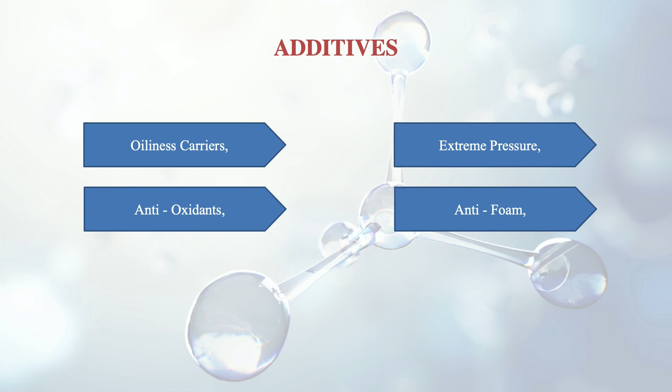Now we discuss the synthetic lubricating oils. We have seen the natural ones before; now the synthetic ones, which are manufactured by human beings for more severe operating conditions like those existing in aircraft engines, in which oil may have to be pumped at -50 degrees centigrade, but when the aircraft is landing or taking off, the same oil will get heated to as high as 250 degrees centigrade. So the range of variation is around 300 degrees centigrade.

Such properties are needed that it should not freeze, and it should not break down at high temperature. High temperatures and high operating pressures require oils which give superior resistance to oxidation with a high viscosity, but they must possess a sufficiently low freezing point, and the lubricant should be non-inflammable as well, because at 250 degrees centigrade it can catch fire if its ignition point is not high.

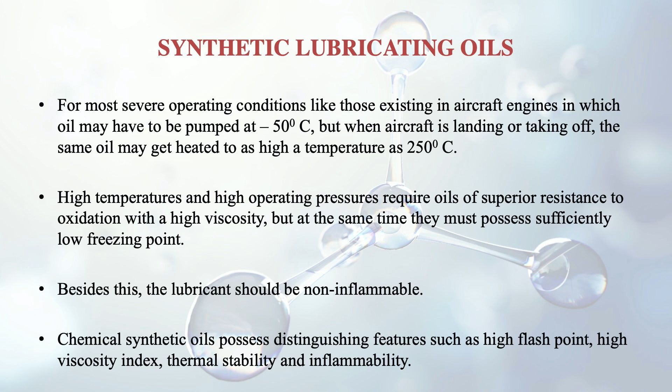Chemical synthetic oils possess distinguishing features such as high flash point, high viscosity index, thermal stability, and non-inflammability. Like I told you, it should not burn at a low temperature; the flash point should be at least above 250 degrees centigrade. That's why high flash point is given here.

Then come the greases, or semi-solid lubricants. Till now we discussed the liquid type; now we discuss the semi-solid, the second category according to physical state. Lubricating grease is semi-solid, consisting of soap dispersed throughout a liquid lubricating oil. The liquid lubricant may be petroleum oil or a synthetic oil, and it may contain additives for specific requirements.

Greases are prepared by saponification of fat with alkali. Saponification is a process where we use fat and oil to make soap-like things. This is followed by adding hot lubricating oil under agitation. The total amount of mineral oil added determines the consistency of the finished grease, so according to the consistency we need, we add the mineral oil.

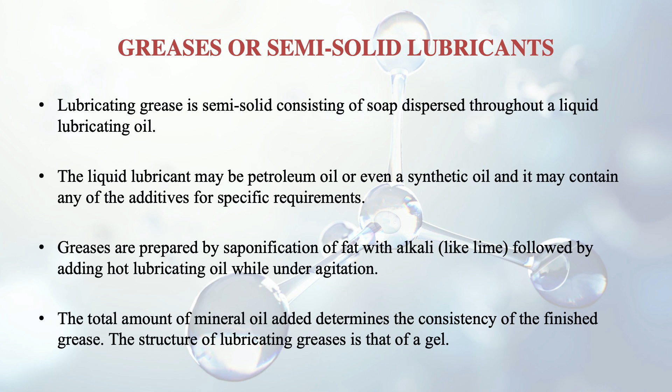The structure of lubricating greases is like that of a gel, like toothpaste or shaving cream. Soaps are gelling agents which give an interconnected structure containing the added oil. At high temperatures, the soap dissolves in the oil, the interconnected structures cease to exist and the grease will liquefy. So its property of providing semi-solid lubrication will go away.

Consistency of greases may vary from a heavy viscous liquid to a stiff solid mass. They may become solid at some point, and completely liquid at some point, so consistency varies. To improve the heat resistance of grease, inorganic solid thickening agents are added. Again, additives can improve the property as per our need.

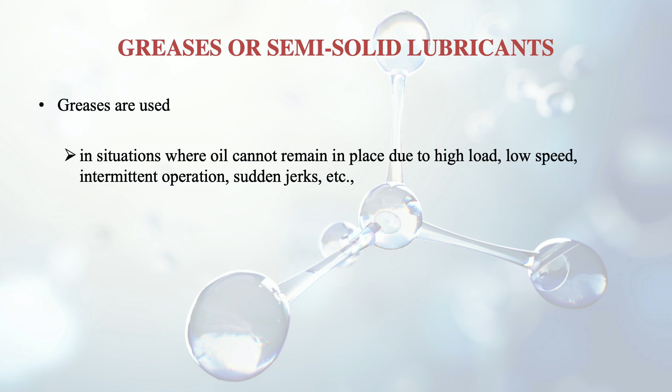Greases have higher shear or frictional resistance than oils, and therefore can support much heavier loads at lower speeds. This is a very good property of grease. They are used in situations where oil cannot remain in place due to high load, low speed, intermittent operation or sudden jerk, and in bearings and gears working at high temperature.

Also in situations where a bearing needs to be sealed against entry of dust, dirt, grit or moisture, because greases are less liable to contamination by these. And finally, in situations where dripping or spurting of oil is undesirable, we use grease, because unlike oils, grease does not splash or drip over articles being prepared by the machine.

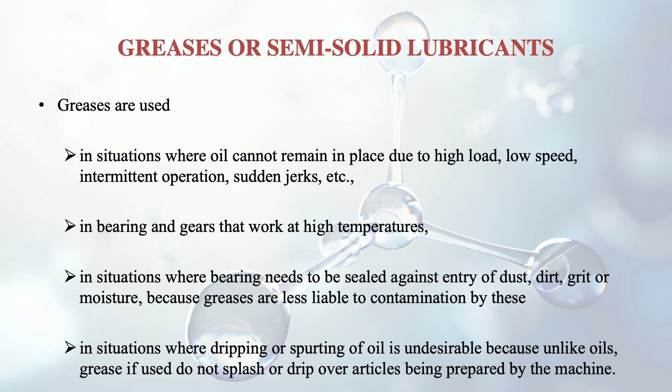So what are the soap functions? We have discussed about soap. So what are its functions actually? The main function is to act as a thickening agent, so that grease sticks firmly to the metal surfaces. That's what its function is. However, the nature of soaps decides three things: the temperature up to which the grease can be used, the consistency of the grease, and finally the water and oxidation resistance is also determined by these soaps.

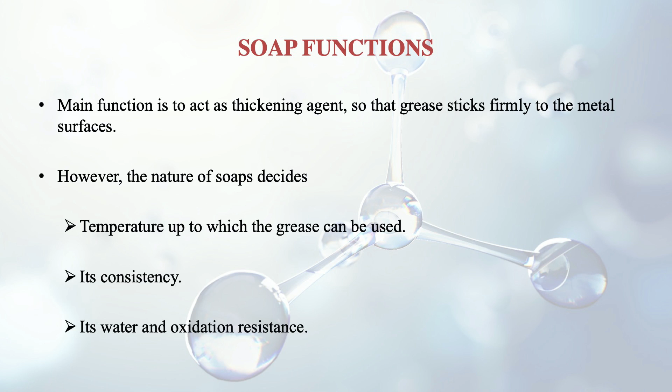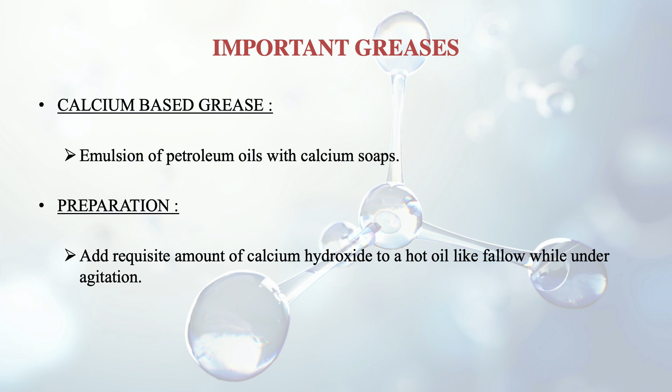So there are certain important greases we will discuss here. The first is the calcium based grease, which is an emulsion of petroleum oils with calcium soaps. How is it prepared? We add the requisite amount of calcium hydroxide, that is Ca(OH)2, to a hot oil like tallow while under agitation. So this is the process of preparation.

And what are its properties and applications? These greases are very cheap and very commonly used, and they are insoluble in water. They are satisfactory for use only at low temperatures, because above 80 degrees centigrade the oil and soap begin to separate out, so then we cannot use them.

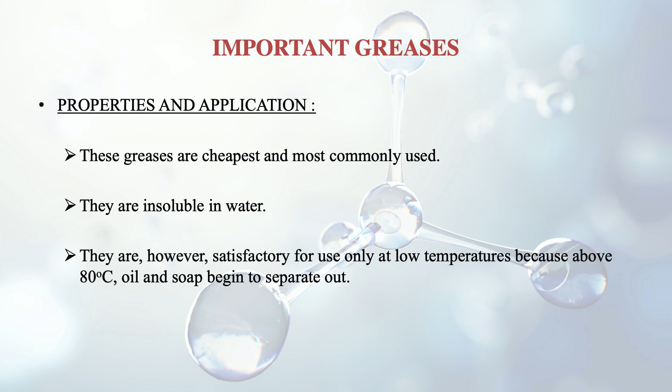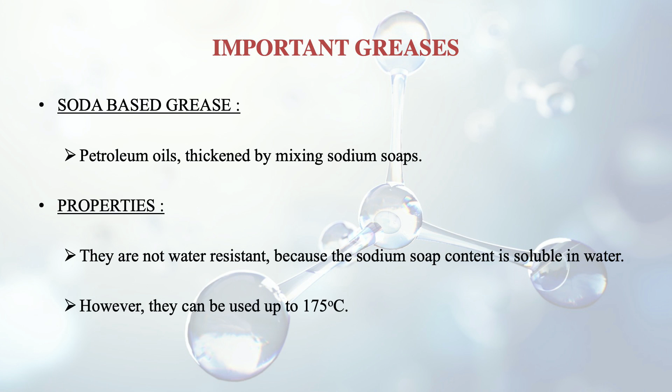Then there is the soda based type of grease, which comprises petroleum oils thickened by mixing sodium soaps. What are the properties of these? They are not water resistant, because the sodium soap content is soluble in water, so we cannot use it for water resistant purposes. But it can be used up to very high temperatures like 175 degrees centigrade, so it can be used in high temperature applications, like in ball bearings, when the lubricant gets heated due to friction, because it can withstand high temperature.

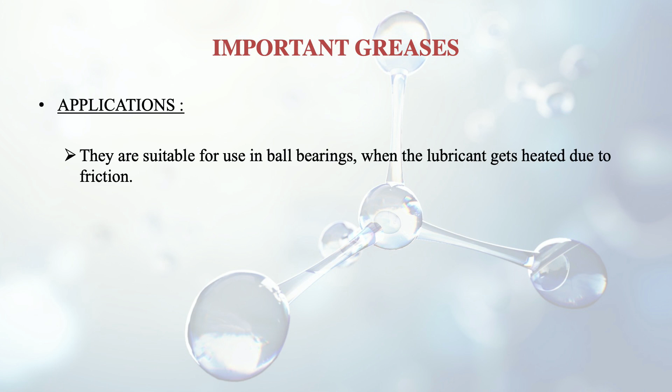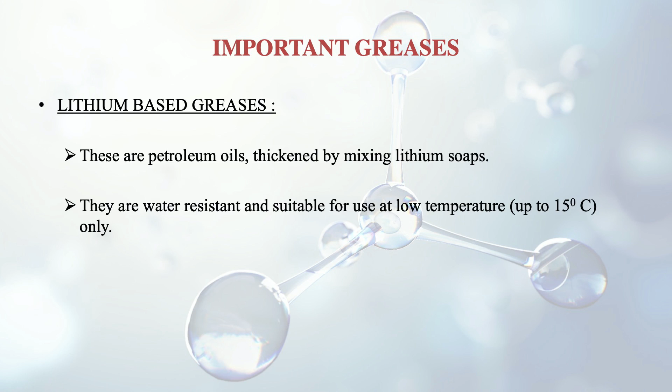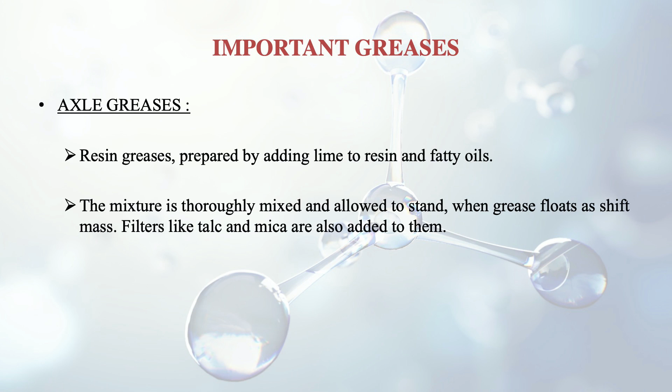Then there are the axle greases. Axles, you know, there are axles in vehicles. These are resin greases prepared by adding lime to resin and fatty oils. This is the process: the mixture is thoroughly mixed and allowed to stand. When grease floats as a stiff mass, fillers like talc and mica are also added to them. And these axle greases are water resistant and suitable for less delicate equipment working under high loads and at low speeds.

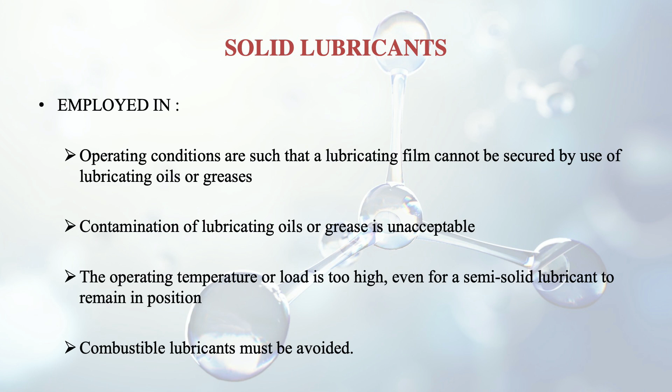And also in places where contamination by lubricating oils or grease is unacceptable. Then where the operating temperature or the load is too high even for a semi-solid lubricant to remain in position, such that even the semi-solid lubricant cannot maintain its consistency, we have to go for solid lubricants. And finally, where combustible lubricants have to be avoided, we use this type of solid lubricant, because generally liquid and semi-solid types are more prone to catching fire.

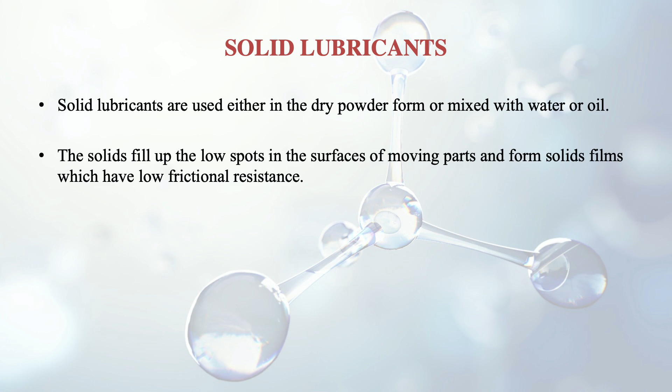Solid lubricants are used either in the dry powder form or mixed with water or oil. So they can be used both ways. Solids actually fill up the low spots in the surfaces of the moving parts. Like we discussed earlier, there are valleys or low spots, so these fill that portion, and thus form solid films which have low frictional resistance. The usual coefficient of friction for solid lubricants is between 0.005 and 0.01, so it is quite low here also.

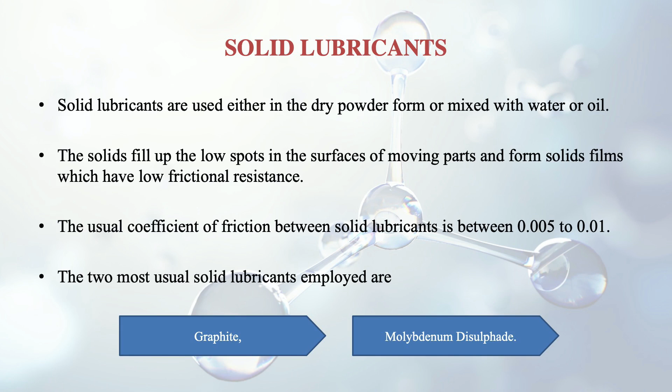And the two most usual solid lubricants employed are graphite and molybdenum disulfide. So these are the most common ones. We now discuss graphite. We have also seen graphite when we were discussing iron and steel, and how it was helpful there, and it is generally in the form of flakes.

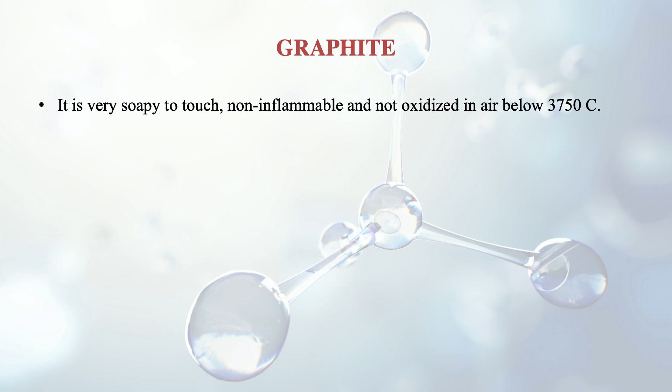Here also we see it is very soapy to touch, it is non-inflammable and is not oxidized in air up to a temperature of 375 degrees centigrade. In the absence of air, it can be used up to much higher temperatures. So if air is not there, we can go beyond 375 degrees centigrade also, so it can be good for high temperature applications.

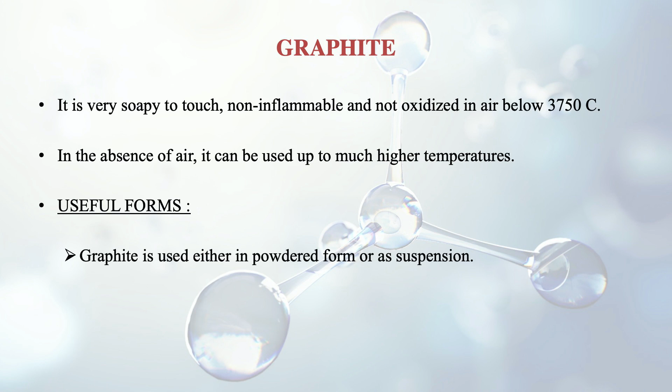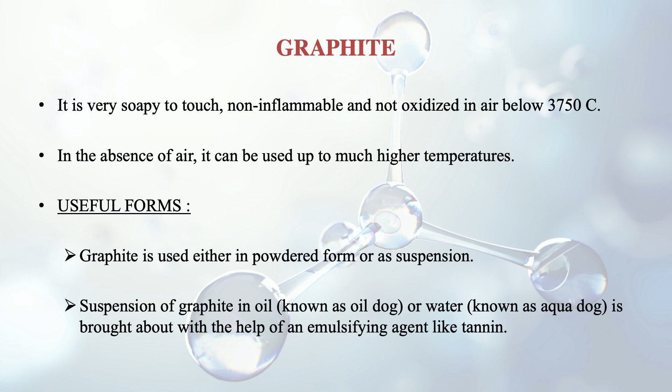And what are the useful forms of graphite? Graphite is used either in the powdered form or as a suspension. A suspension of graphite in oil is known as oildag, whereas a suspension of graphite in water is known as aquadag. This is done using an emulsifying agent like tannin. Oildag, the emulsion of graphite in oil, is particularly useful in internal combustion engines because it forms a film between the piston rings and the cylinder, giving a tight fit contact, thereby increasing compression.

And the Aquadag one is useful where a lubricant free from oil is needed. Suppose there is a certain situation, like in case of our foodstuffs, we cannot have certain oil which is not good for health if we consume it, so we don't need that oil. So in that case, we will have to use the water-based one, that is the Aquadag. So what are the uses of graphite then? They are generally used in air compressors and lathes.

And the second one, that is molybdenum disulfide. These possess a very low coefficient of friction, and they are stable in air up to 400 degrees centigrade. So they are even better than graphite if we take the case of temperature. And its fine powder may be sprinkled on surfaces sliding at high velocities, where it fills low spots in metal surfaces, forming a thin film. So this is the same type of process as graphite, and it is also used along with solvents and in greases.

Besides graphite and molybdenum disulfide, there are other substances also like soapstone, talc, mica, etc., and these can be used as solid lubricants.

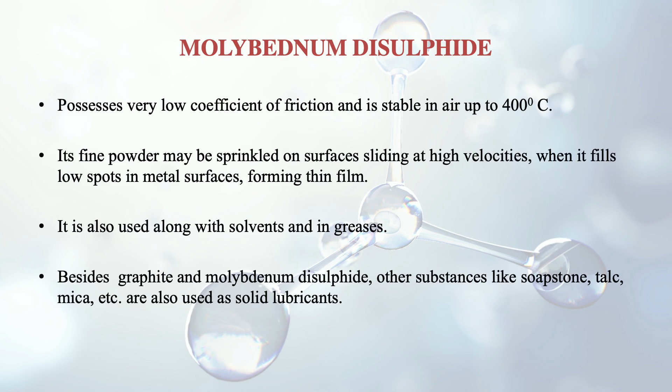So now we discuss the general properties of lubricants. First one is viscosity. And what is viscosity actually? Viscosity of a fluid is the property which resists its flow or shear. So if a certain fluid is moving, the resistance between the layers of that fluid will be known as viscosity. It is the resistance to the motion of the fluid. The quantitative measure of this property is given in terms of the dynamic or absolute viscosity. Absolute viscosity is defined as the force required to shear a layer of unit thickness at unit velocity, and its unit is poise, and there is also centipoise.

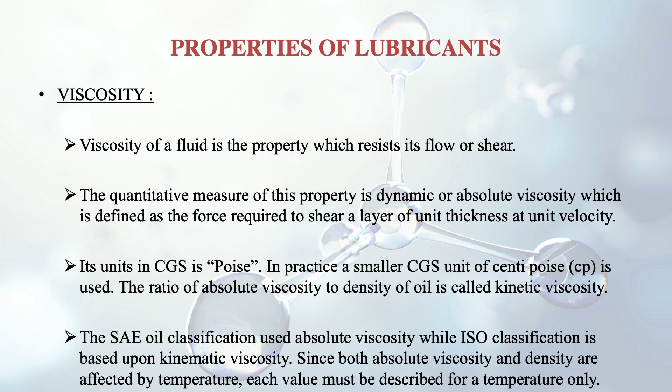And the ratio of absolute viscosity to density of oil is called the kinematic viscosity. So kinematic viscosity deals with the internal resistance. There is the SAE, the body which deals with fluids and lubricants. SAE oil classification uses the absolute viscosity, while ISO classification uses the kinematic viscosity. Since both absolute viscosity and density are affected by temperature, each value must be described at a certain temperature, because they change with temperature.

And then what is volatility? This is also a property of lubricant. Volatility of a lubricant is the tendency of going into the vapor phase, how quick or how slow. And it is very important in cases where lubricant is used in the form of thin films, as in boundary lubrication, because if it goes into vapor very quickly, there may be nothing in between the contacting surfaces. An example is rolling contact bearings.

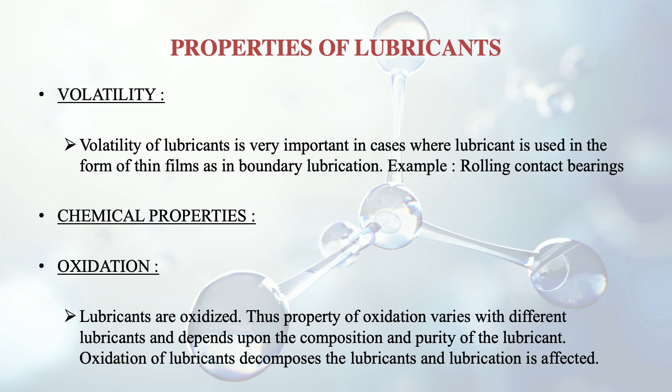Then there are chemical properties of lubricants, like oxidation. Lubricants are oxidized, and the property of oxidation varies with different lubricants, depending upon the composition and purity of the lubricant. Oxidation decomposes the lubricants and lubrication is affected, so this one is very important. Then there is hydrolysis, a chemical reaction by which various types of lubricants are decomposed. Examples are the esters.

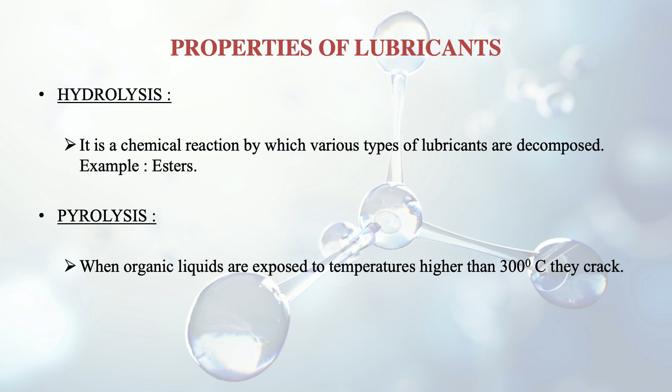Then pyrolysis. When organic liquids are exposed to temperatures higher than 300 degrees centigrade, there is a tendency to crack. This phenomenon is known as pyrolysis. The rate of cracking differs with different compounds depending upon their composition. It has been found that cracking is generally a free radical chain reaction and is generally accelerated by oxidation. So lubricants used should not crack under lubrication, and we have to see that oxidation also doesn't take place, because it will lead to cracking.

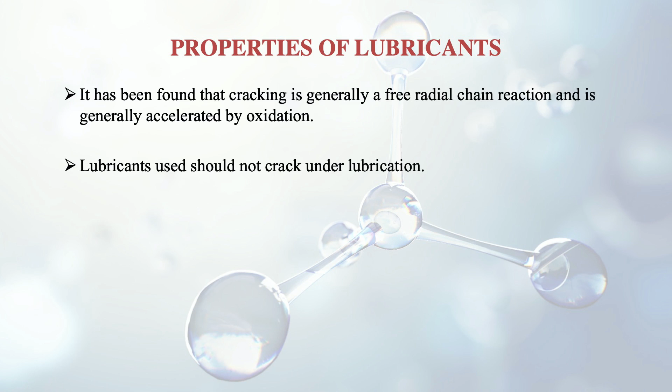Then we have one more property, that is viscosity index. The absolute viscosity of lubricants decreases with rise in temperature. We have seen earlier that absolute and kinematic viscosity both depend upon temperature. Absolute viscosity decreases with rise in temperature because the molecules tend to move farther apart, and there will be much easier movement, so the resistance will decrease.

That's why it goes down. The rate at which absolute viscosity changes with temperature is called the viscosity index. So this viscosity index is telling about the rate at which the absolute viscosity is changing. High rate of change of viscosity indicates low viscosity index and vice versa. And actually we prefer oils of high index.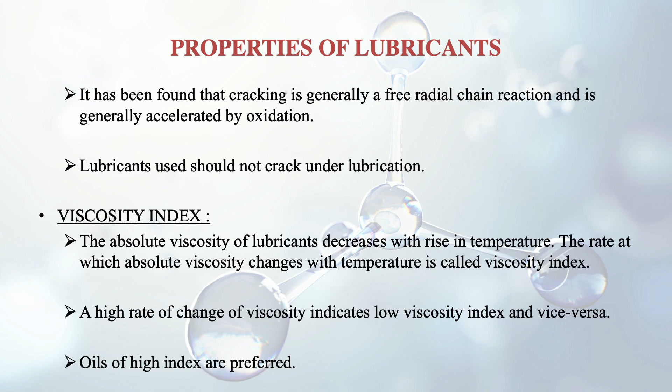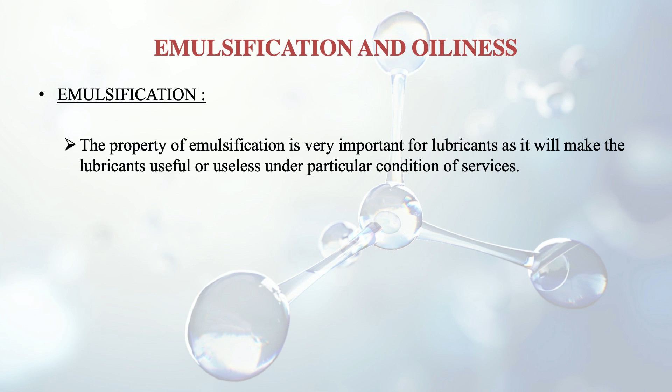Then we come to the phenomena of emulsification and oiliness. So emulsification is the property which is important for lubricants, as it will make the lubricants useful or useless under particular conditions of service. For example, in the case of steam turbines, it is necessary that the emulsion formed by the lubricant with water should separate very quickly and easily.

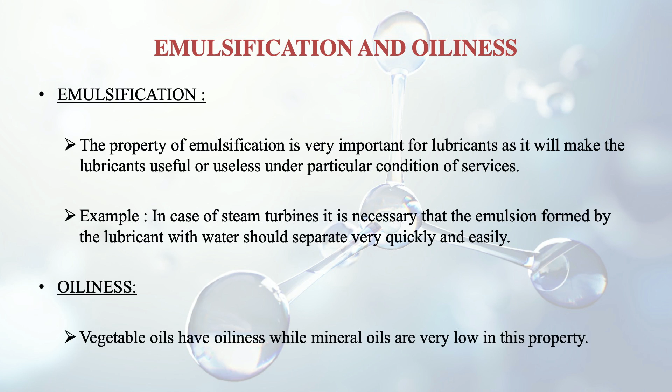And what is oiliness? Vegetable oils have oiliness, like we discussed earlier, while mineral oils are very low in this property. In order to improve the oiliness of the mineral oils, additives such as vegetable oils and fatty acids like oleic and stearic acids are added, which we have seen earlier as well.

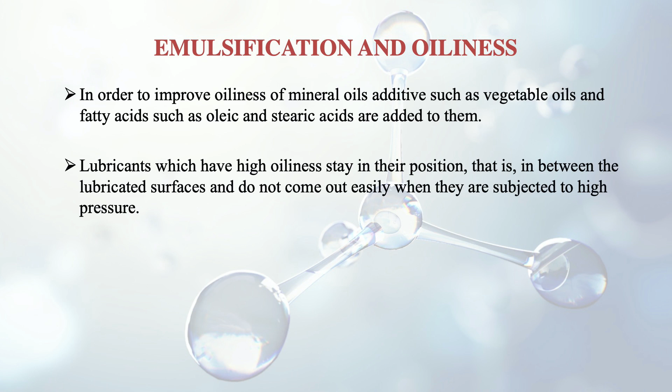And lubricants which have high oiliness actually stay in their position, that is in between the lubricated surfaces, and they do not come out easily when they are subjected to high pressure. So that's why oiliness property is important. So after discussing these properties, we move on to the cutting fluids now, and what advantages or disadvantages they bring in.

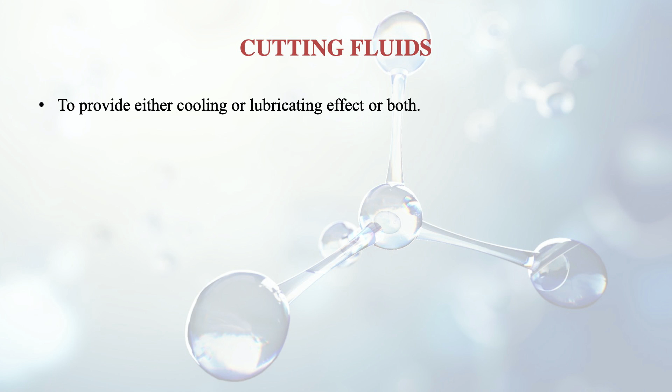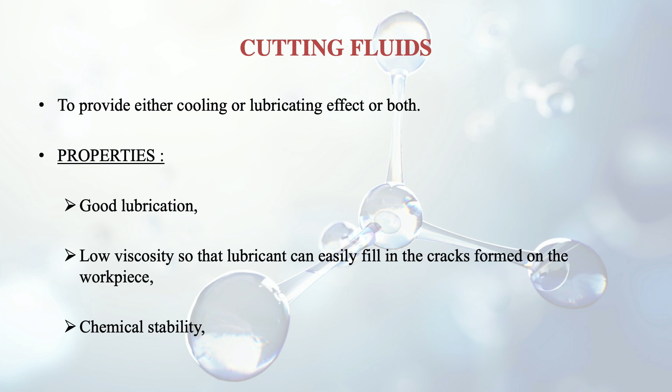These cutting fluids are used to provide either cooling or lubricating effect, or both. That's why cutting fluids are used. And what are their properties? They have good lubrication, low viscosity, so that lubricant can easily fill in the cracks formed on the workpiece. They are chemically stable and non-corrosive towards the metals of the workpiece as well as tool, and they have high thermal conductivity.

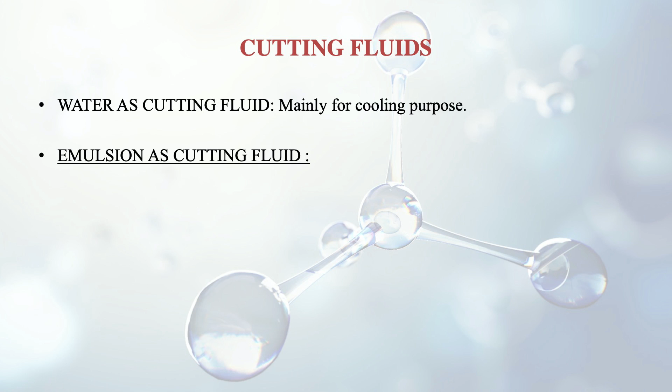Then what about water as a cutting fluid? It is mainly used for cooling purposes. What about an emulsion as a cutting fluid? In most cases both a cooling agent and a lubricant are needed simultaneously. We need oiliness as well as the cooling effect, so that the portion is not heated up beyond limits. For such situations, oil-water emulsion is employed. So we mix the two, oil and water.

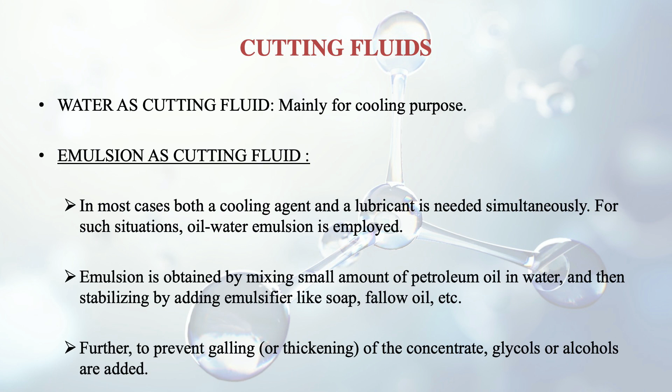Emulsion is obtained by mixing a small amount of petroleum oil in water, and then we stabilize it by adding an emulsifier like soap, tallow oil, etc. Further, to prevent galling, thickening of the concentrate, glycols or alcohols, meaning compounds having OH bonds, are added. Besides this, certain germicides are also added to prevent germs from attacking the emulsion. Sodium nitrate is one of the germicides.

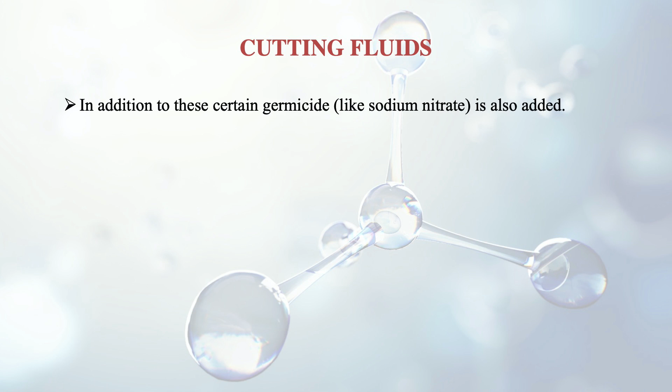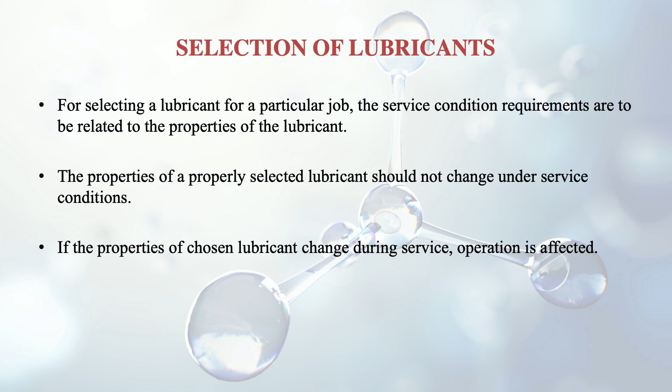Now, how do we select the lubricants? For selecting a lubricant for a particular job, the service condition requirements are to be related to the properties of the lubricant. The properties of a properly selected lubricant should not change under service conditions. If the properties of the chosen lubricant change during service, then operation will obviously be affected.

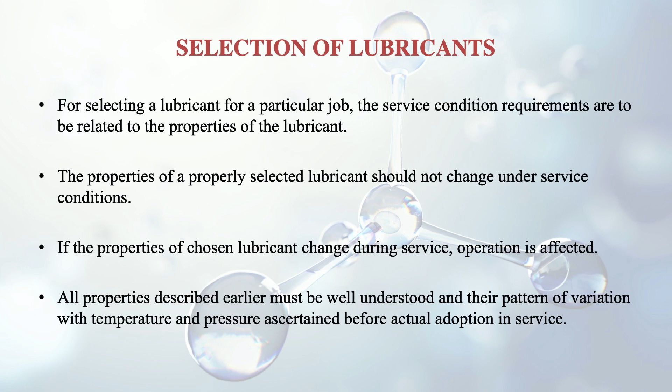So all properties described in this session must be well understood, and their pattern of variation with temperature and pressure should be ascertained before actual adoption in service, because there is a high temperature range and quite a variation in pressure also. So we need lubricants which can hold their own at different temperatures and pressures.

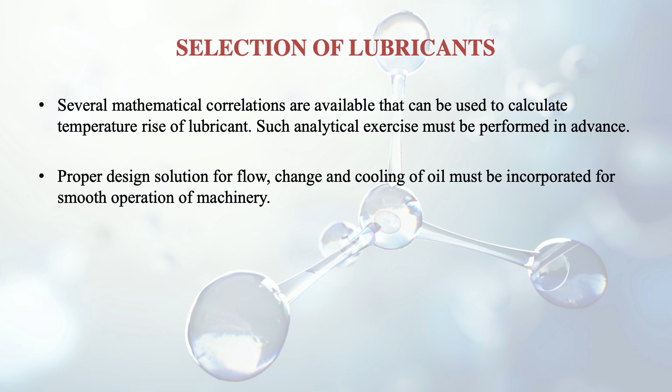Several mathematical correlations are available that can be used to calculate temperature rise of the lubricant, and such analytical exercise must be performed in advance. Finally, proper design solutions for flow change and cooling of oil must be incorporated for smooth operation of machinery.

So in this session we discussed the various kinds of lubricants, like the semi-solid and solid lubricants. In addition, we saw what emulsification is and various other things, and finally we got to know how to select lubricating oils.